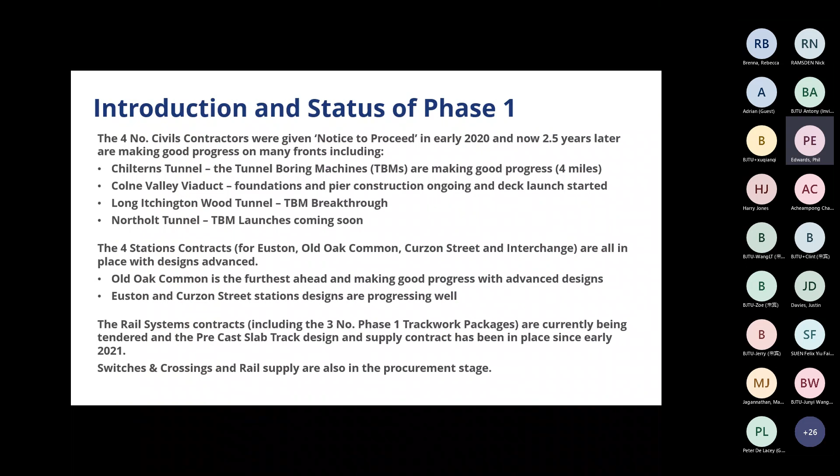This just gives you an image of the packages. So you can see the geographical packages for phase one and phase 2A, which is the other phase, which has also got approval to go forward with, and the material supply contracts, shown in orange.

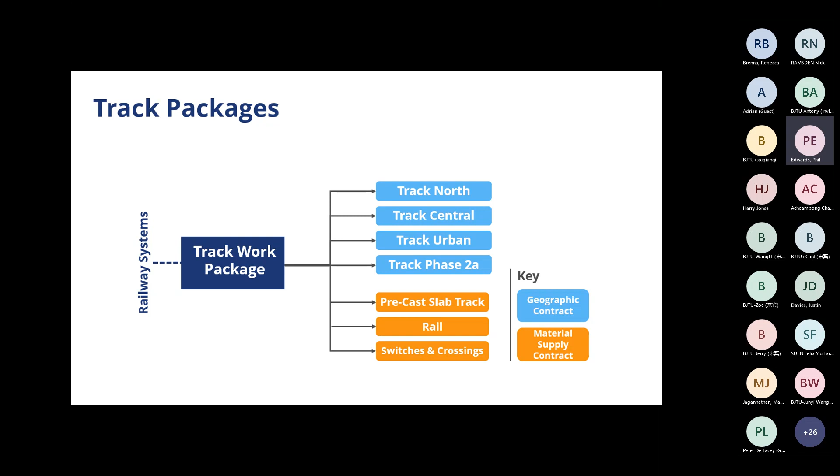So looking at phase one and going from right to left, we've got London Euston Station, which is currently a 10 platform station. Going towards the left, we've got the Euston Tunnel, Old Oak Common Station, which is a station box, Northolt Tunnel, then West Ruislip Sidings, Colne Valley Viaduct, and then Chilterns Tunnel. And that's the urban, the London end of the urban section.

And then we go forward on the high speed on the open section through and past Calvert Infrastructure Maintenance Depot, onto Birmingham Interchange before we reach the junction to Birmingham Curzon Street.

And you've got Washwood Heath Depot, which is part of the rolling stock depot, which is quite close to Birmingham Curzon Street, as you can see there. And that depot area, Bromford Tunnel and the Curzon Street Station, are all within the urban area as well.

And the remainder are split up into central and north, with north going on with connections to the east, and also straight on to phase 2A and to Handsacre Junction. Now, the connection to Handsacre Junction onto the West Coast Main Line enables services to run to Stafford, Stoke and Macclesfield in the future, and the services from London Euston going up through phase 2A will go on to Crewe and to other destinations to the north.

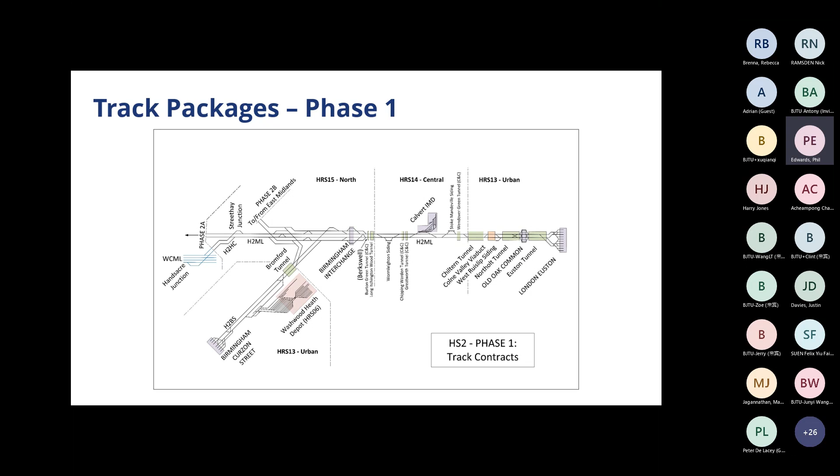This is phase 2A, still being in the design stage. This one is further behind than phase 1, but it shows you the layout there. We've got another infrastructure maintenance base at Stone, and then we've got a couple of tunnels and a junction again with the West Coast Main Line to Crewe,

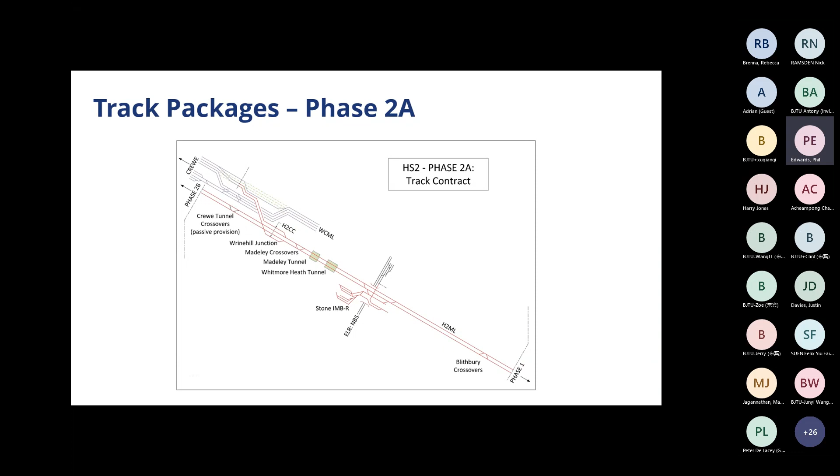with the leg going towards phase 2B, which is still yet to gain hybrid bill approval. So phase 2B, you can see phase 1 in the dark blue at the bottom of this map, and then going further to the north, you've got the orange, which is the western leg, which is going through the hybrid bill stage, and then the green, which is the eastern leg, which is currently still under development.

And on phase 2B, the western leg, the current track form configuration considers slab in Crewe Tunnel, slab from Manchester Airport Station to Piccadilly Station, including Manchester Tunnel, and possibly ballast in the rest of the route. But this is still yet to be decided whether it will be ballast or slab track in this section. For the western leg, the current environmental mitigations consider slab track along the whole route as the worst case for hybrid bill.

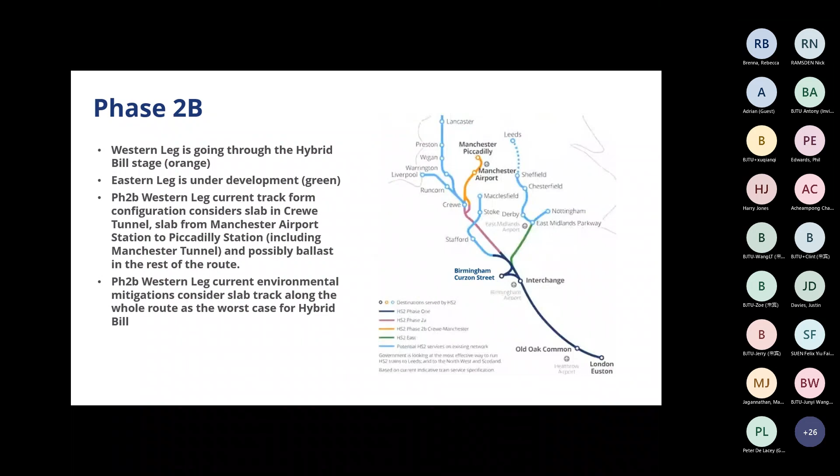Okay, so the route alignment design and requirements. First of all, the route alignment is future-proofed for up to a maximum speed of 400 kilometers per hour, and the civils designs, so the structures and earthworks, are also future-proofed for up to 400 kilometers per hour. But the individual track alignments will be designed for speeds up to a maximum of 360 kilometers per hour, and that is currently the maximum operating speed we are looking at. That could be under review in the future, but currently 360 is the speed we're working to at the moment.

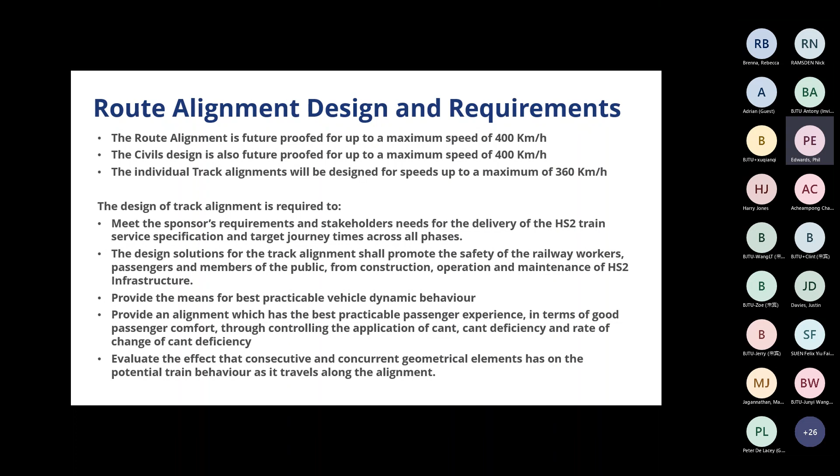The design of the track alignment is required to meet the sponsor's requirements and stakeholders' needs for the delivery of the HS2 train service specification and target journey times across all phases. The design solutions for the track alignment shall promote the safety of rail workers, passengers and members of the public from construction, operation and maintenance of HS2 infrastructure, provide the means for best practicable vehicle dynamic behaviour, and provide an alignment which has the best practicable passenger experience in terms of good passenger comfort through controlling the application of cant deficiency and rate of change of cant deficiency. It should also evaluate the effect that consecutive and concurrent geometrical elements have on potential train behaviour as it travels through the alignment.

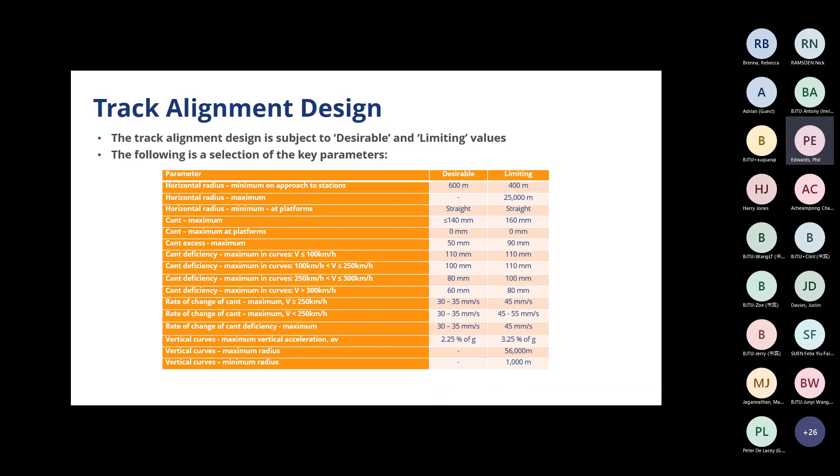So for the track alignment design, I have some parameters here, which are not all of them, but just ones that I've chosen to show. We have a track alignment design which is subject to desirable and limiting values, which is quite normal practice, and here's a selection of the different values which we've currently got in our standards. I won't go through each of these, but you can see the maximum cant deficiency, rate of change, etc. We've also got curvature.

Just a slide here on gauging design. So the gauges that we have on HS2, we've got actually 6 gauges, which are all a variation, but quite similar, with slight differences. But they're all based around the reference profiles you can see at the bottom of the screen here, which are the GC reference profile. So all of our gauges encompass the GC reference profile, and also the GI2 reference profile at the lower sector. And the OCS gauges allow for the A 2.1 pantograph head, of length 1600 millimeters.

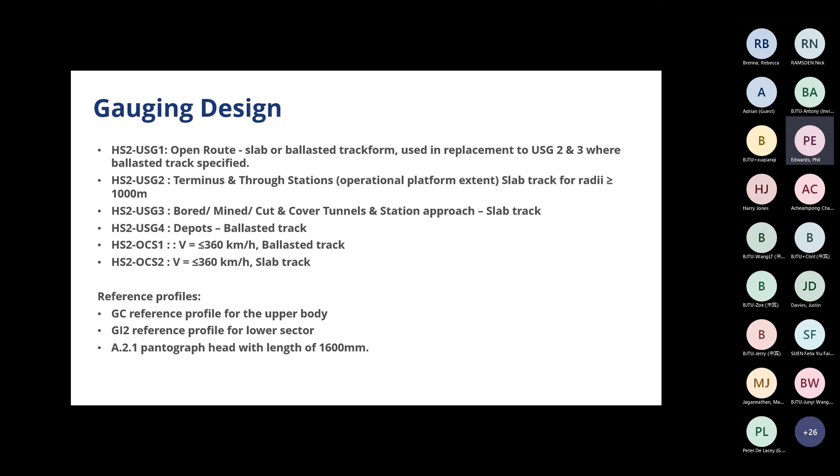So our standards include our general track specification, and this track system is specified, designed, constructed, and commissioned in accordance with the infrastructure technical specification for interoperability, the TSIs. So this is a track specification based on European high-speed TSIs, and although the UK is no longer in Europe, we haven't significantly changed our standards from that period of time. We're tweaking the standards as we go, as things emerge, but it's essentially a TSI compliant set of standards.

Some of the key requirements are that it is to be capable of accommodating earthwork settlements within specified limits - so the design of the track needs to accommodate settlements. To meet noise and vibration requirements in the approach to the track system design, and where necessary specifying additional mitigation measures. To provide a minimum track system design life of 60 years - that's not applicable to rail replacement, but it is for the whole system generally - with minimal requirements for inspection and maintenance in line with as low as reasonably practical principles.

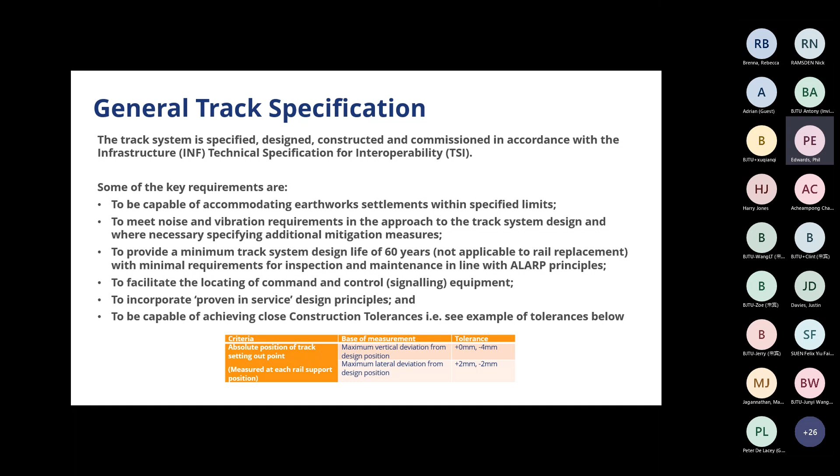To facilitate the locating of command and control signalling equipment, to incorporate proven in-service design principles, and to be capable of achieving close construction tolerances - see the example of the tolerances below. As you can see, they're very close tolerances: the vertical deviation is +0, -4, and the deviation from the lateral position is ±2 millimeters. So we have a range of 4 millimeters essentially, both in the horizontal and vertical. But there are other tolerances which are specified - this is just the ones I've picked for this slide.

So just a slide here on CWR design. Our stress-free temperature, because HS2 is, for the main line, slab track throughout - we've got an SFT of 24 degrees ±3 degrees. And the SFT in tunnels is different because it's determined as follows: the SFT in tunnels applies to the length between 2 points, each of which is 40 meters inside the tunnel portals. The rail is given time to acclimatise inside the tunnel to the tunnel temperature before it's fixed and fastened down, and then the rail temperature at which the rail is fastened down becomes the tunnel SFT for that location, and it's recorded as such.

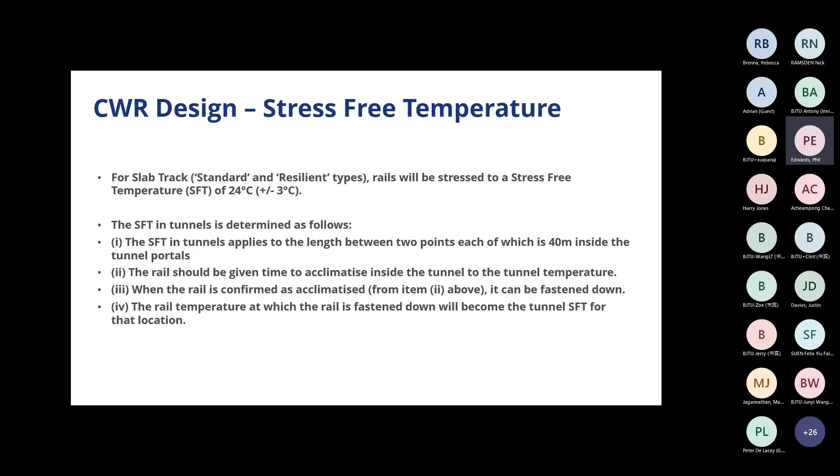So the track system design, as I said earlier, on the main line, the standard track is precast. Well, it's all slab track, but the standard track is precast slab track throughout most of the open route, and that includes the Chiltern tunnels, Long Itchington Wood Tunnel, and the cut and cover tunnels. But in the urban areas, we have a resilient track, which is yet to be decided.

This is due to the need to select a system that meets the acoustic targets, that can show it's proven in service at speeds applicable to the location where it's to be installed, and meets the noise and vibration targets as well.

And then we have a third track system type, which is special track, in terminal station platforms. That's particularly to allow drainage of the bioreactor waste grey water discharge from under the trains when they're stationary in the platforms. So that track form will have a channel which allows the discharge of that water.

And then in depots, mainly it will be ballasted track, with some slab track just at the entrance to the depots. The sleepers in the depots are likely to be either concrete or composite sleepers. This is still yet to be decided.

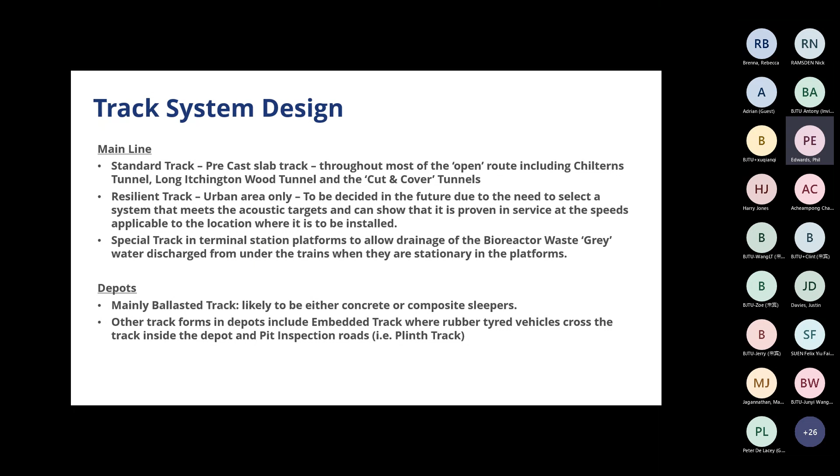So here's a typical cross section for the precast track, and what you'll notice is provision for 3 trough routes on each side. Inside of the mast, we had a long debate about whether that troughing should be on the inside of the mast or the outside in the cess. We have provided 3 on each side, but it's not always going to be 3 on each side - there's going to be a reduction in some places where it's not required. So that's really the worst case scenario.

And this is the cross section in a cutting on straight and level track. So it shows you the drainage on the outside, because this is in a cutting. You've got some drains beyond the walkways.

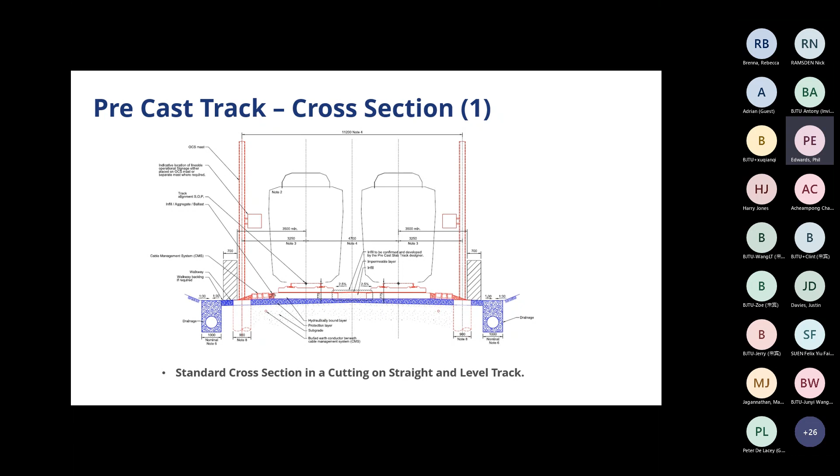Cross section on canted track. Just to give you an idea here, the 2 low rails are roughly the same level, and you end up with a sort of channel in the middle. In a cutting scenario, this means you've got to have drainage from the centre of the tracks out to the cess, as shown there.

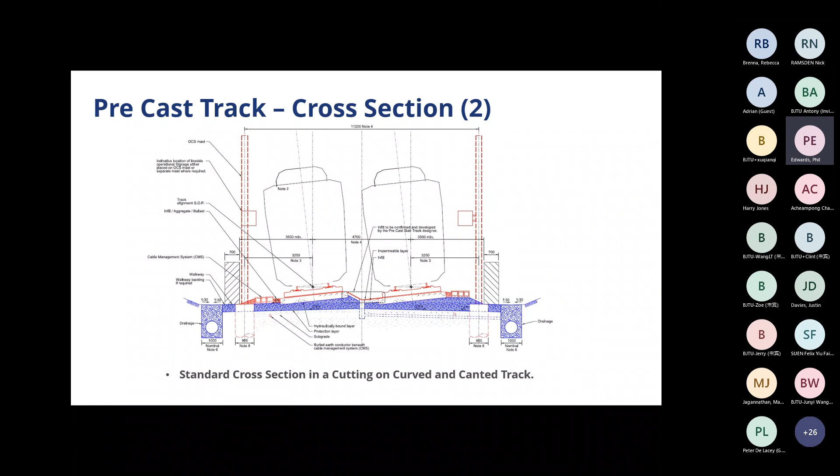So our standard track, which is precast track - I mentioned earlier that the precast contract has been in place for some time now. Some of the benefits of having precast track is that there's a 15-month program opportunity for phase 1 route, which, because of the way we've procured our contracts, we've been able to award a precast contract very early before the track contractors come on board. This allows production of the precast units to be done so we can get a good gain on the program, so that when the track contractor comes on and starts design and construction, this activity can be well underway and mature.

Another advantage is the quality control and site construction environmental factors. With casting these precast units in a factory environment, there are a number of benefits to doing that, with quality control and also for carbon reduction.

And also, in years and years to come, if we need to replace the track system, removing precast units as opposed to in situ concrete will, in our minds, be easier to do. So the replacement methodology is more efficient with the precast.

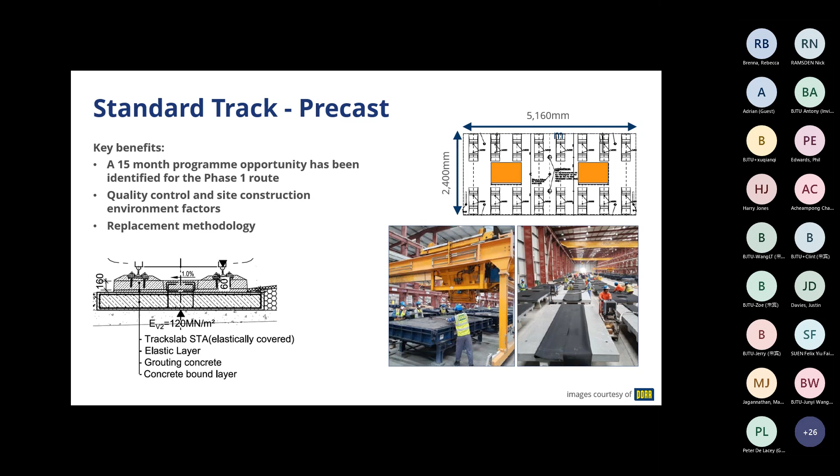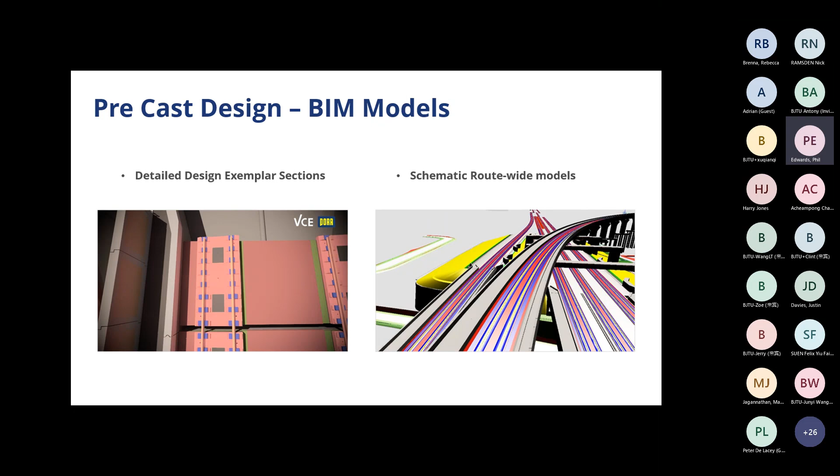A little bit about the surrounding interfaces to the precast design. First of all, the precast sits on a grouting layer and on the concrete bound layer. Each unit sits on that and is tied in with reinforcement keying into the units, which sits on a protection layer underneath the CBL. The bearing capacity of the protection layer is 120 meganewtons per meter squared, which is a very solid base. That's the requirement for the earthworks to be compacted to that level.

That's underneath. On top of the units, we've got cable crossings on top and between the joints. Where smaller cables go across the track under the rails, they can go threaded between each slab joint, and there's a 40 millimeter nominal gap, but it can be up to 280 millimeters where a larger gap is needed for cable crossings.

Where cable crossings need to go under the track, they can go in the intermediate layer, but a minimum of 100 millimeter thickness above the crossing itself is necessary. And then cable crossings on the slab surface, where there are very small bonding cables, can just go under the rail and be pinned to the top surface of the slab as well.

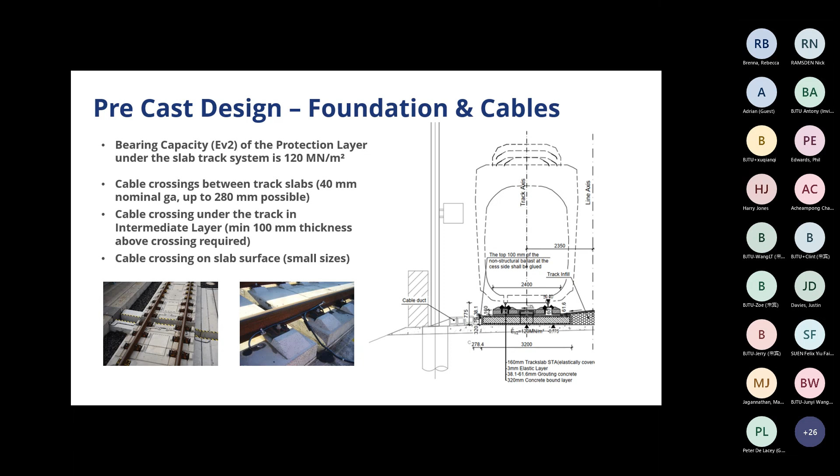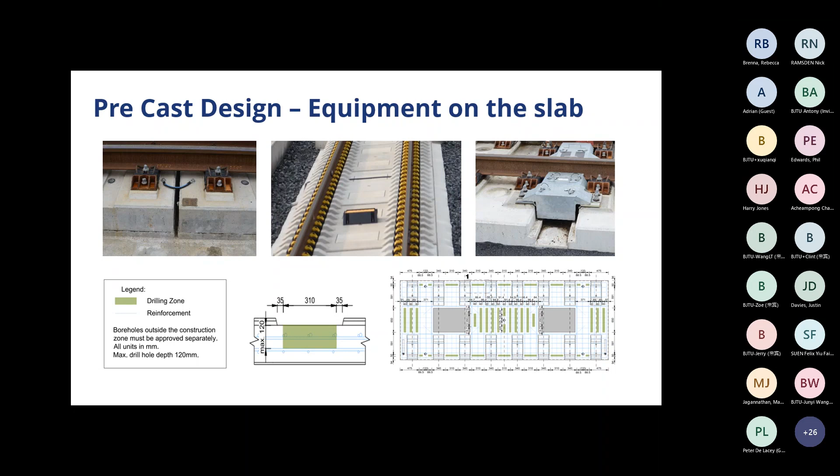Curvature for the precast units: the geometry of the alignment is fed into a computer which controls the casting of the units, and where curved units need to be provided, they are cast so each unit has its own location along the track. The radius of the curve is cast into the slab, and where there's a transition curve, an optimal radius is cast in, with a slight variation to the position of the rail created by the insulators, having different insulators between the rail and the shoulder of the fastening.

In terms of the vertical, there is allowance for settlement and heave, which is possible with the precast slab track units, and that can be corrected in a number of different ways. One way is where packings can be inserted underneath the base plate, and the fastenings will allow for a vertical reserve of a minimum of 70 millimeters, plus or minus 10 millimeters laterally in a horizontal direction.

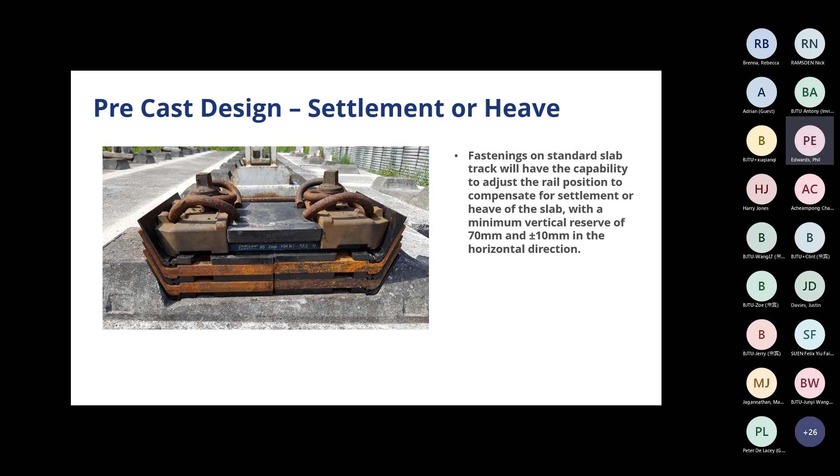There are some special fastenings where there's an interface between the earthworks and the structure. In this particular case, you can see different fastenings across the joint between the abutment and the deck of the bridge, which allows for longitudinal movement of the structure, so the rail stays locked in and fixed, but the fastenings will creep backwards and forwards with the contraction and expansion of the bridge deck.

We also have some structures which are on the skew, and there has to be some allowance for very small lateral movements according to the movement due to the skew of the bridge, restricted to 2.5 millimeters lateral movement, which is accommodated using special fastenings, but over a longer distance than what is shown here.

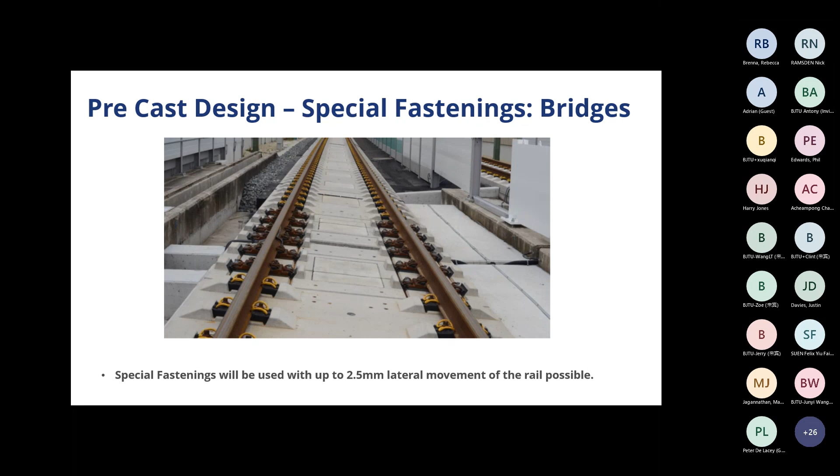On viaducts, particularly our longer ones, there's a need to accommodate some very long gaps for expansion, and a need to fix the structures on either side supporting the rail to give it stability over such a large gap. Where there's a very small gap, because the structure or span expanding is small, there's not so much need to do this. This is a concept illustration of a rail support method used in Europe, and we're anticipating having these sort of arrangements on HS2 when our designer comes on board and looks in more detail about that.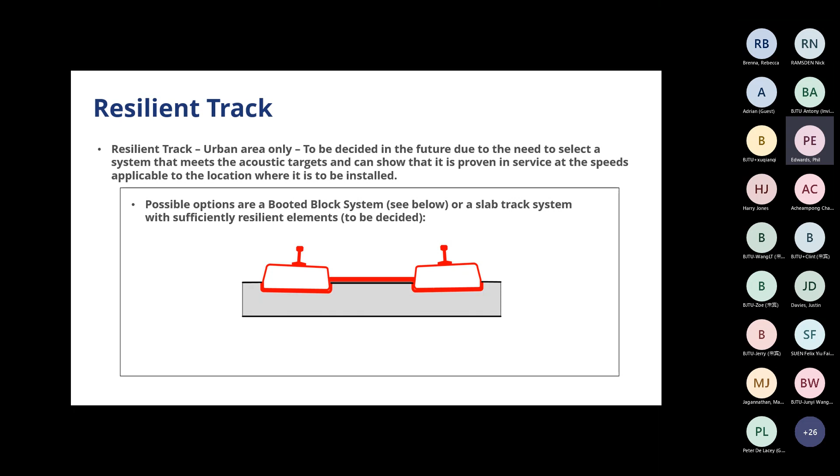Just a note on sound, noise, and vibration. In the tunnels and urban locations, there is more concern about ground-borne noise, and we've got two levels of mitigation, depending on the receptors and whether there are any sensitive areas for sound, noise, and vibration. The level of mitigation needed will have to be studied in the future, and that's mainly in the urban areas where we have that requirement. In the open route, there are requirements for airborne noise to be mitigated, and we have noise barriers and matting in places.

That's basically still yet to be decided exactly, but we have the civils contractors erecting noise barriers in places where they have carried out studies and found that they're needed.

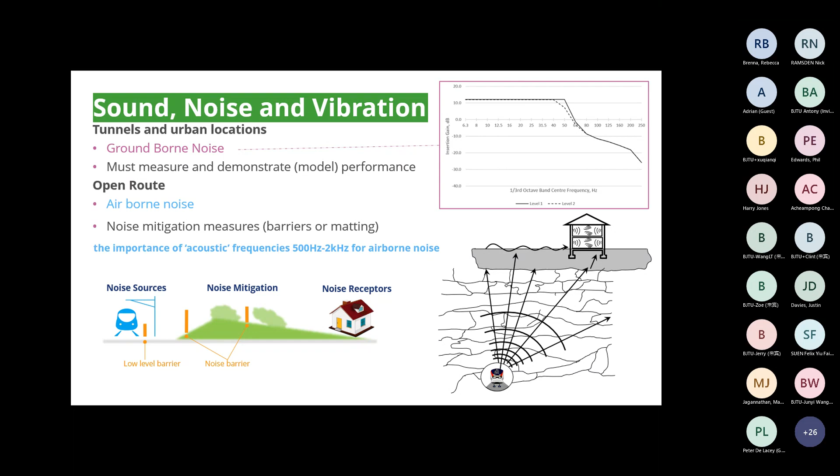Track drainage design - this is the cross section on an embankment, showing at the top where you've got straight and level track. The surface water drainage falls from the centre towards the outside, so water will fall from the middle and go in between the precast slabs, continuing to fall to the outside and away to the sides of the embankment, or to the drainage in the cess if it's a cutting. But where we have curved track, there's a need to drain the centre between the two tracks because of the profiles we've got, and therefore there's central drainage on curved track with inspection chambers to drain the surface out to the outsides.

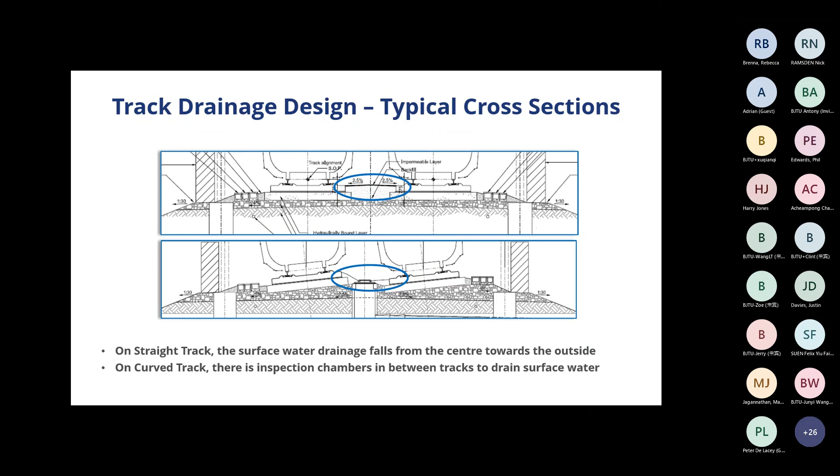Bioreactor waste drainage - I've already mentioned this is evident at Euston and Curzon Street stations, which are terminal stations, and because of the nature and frequency of the service, rather than only emptying the tanks in the depots all the time, there was a need to be able to empty the tanks at other locations. It was decided to do it by treating the waste from the toilets on the trains, filtering and treating it on board, and then discharging it into a drainage system in the track at the platforms. You can see from the images on the right a typical bioreactor arrangement, which would be on the train discharging into the track.

On the right it shows the two options where, in a depot situation, it goes into an intermediate tank and then into a drain, as opposed to discharging directly into the track, which is also shown there. The urban track contractor will be required to design a suitable track drainage system for this when they come on board. The following are some design factors: the water quality has got high salt content, is mildly corrosive to steel and concrete, and contains ammonium liquid, so a track lining is going to be required.

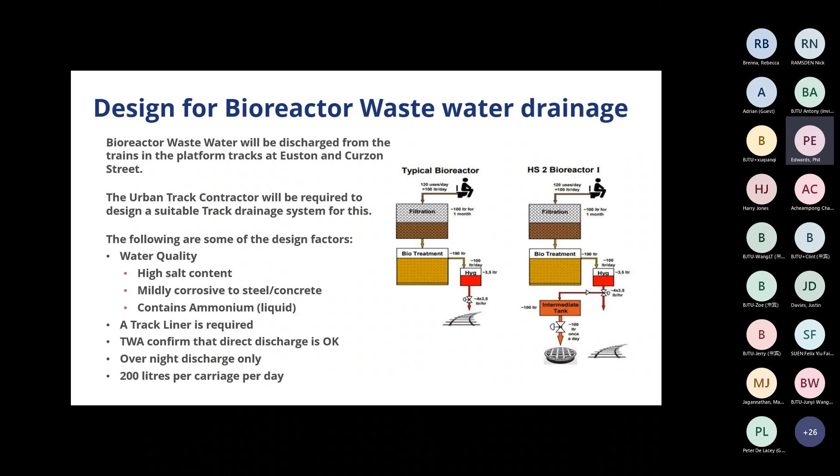Switches and crossings designs: we've got two types of S&C. We've got the high-speed S&C, which has some very long turnouts—some high-speed turnouts are over 125 metres long. And then we've got a whole range of low-speed turnouts as well, which are basically UIC turnouts to the European standards that many people are familiar with from many projects.

The S&C itself will be one of two options: either in situ or precast. We've still got a design to be done in the future to determine this. Some are mandated to be on precast units, but there will be others that could be either in situ or precast. This gives you an idea of the typical layout of S&C and how that might look with the two types.

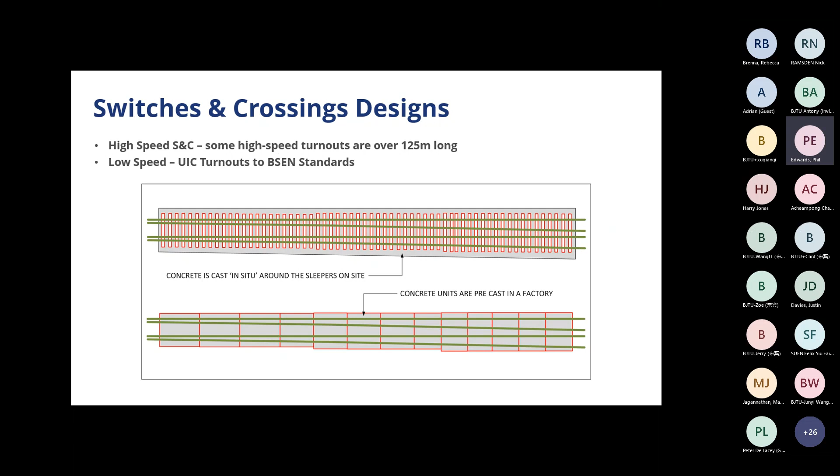In terms of the geometry of the S&C, we've chosen a particular geometry which has clothoid transitions included in the lead of the S&C to enable good passenger comfort and minimise the jerk as the vehicle passes through the diverging path. In some cases it's a double clothoid, in others just a single clothoid at the switch entry going into the turnout, depending on the design. Those diagrams give you an idea of the smoothness of lateral acceleration as a vehicle goes into the diverging path, avoiding an abrupt change of direction which you'd otherwise get with a conventional circular S&C geometry.

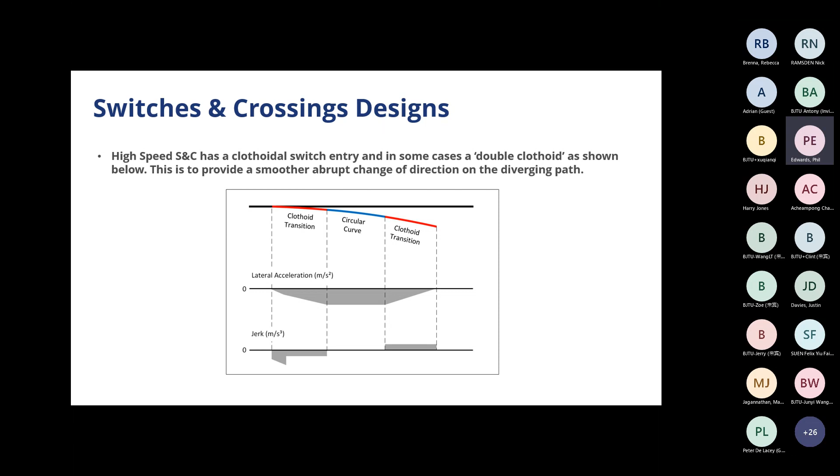Rail expansion devices: PORR have been looking at our RED designs, although we've still got more to do on this in the future. They've performed some studies, and there's a possibility of incorporating a RED into the Slab Track Austria system itself—at least that's been established. REDs are normally combined with a special structure to bridge the gap, limiting the rail support distance to a predefined maximum of 650 millimetres. This is required to limit rail deflection from passenger traffic and bending stresses in the rail profile. Possible solutions and their applicability need to be defined case by case, depending on expansion joint, space requirements, anchorage forces, drainage, etc.

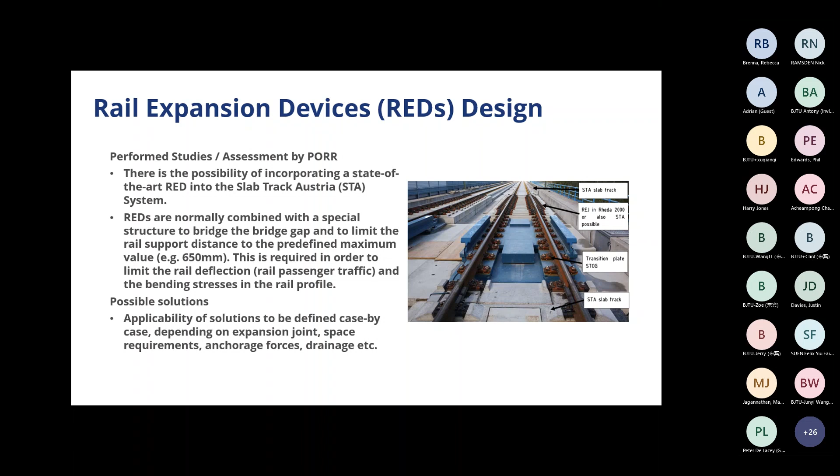Okay, so that's it actually. Thanks for listening, and if you've got any questions, I'm happy to try and answer them as best as I can.